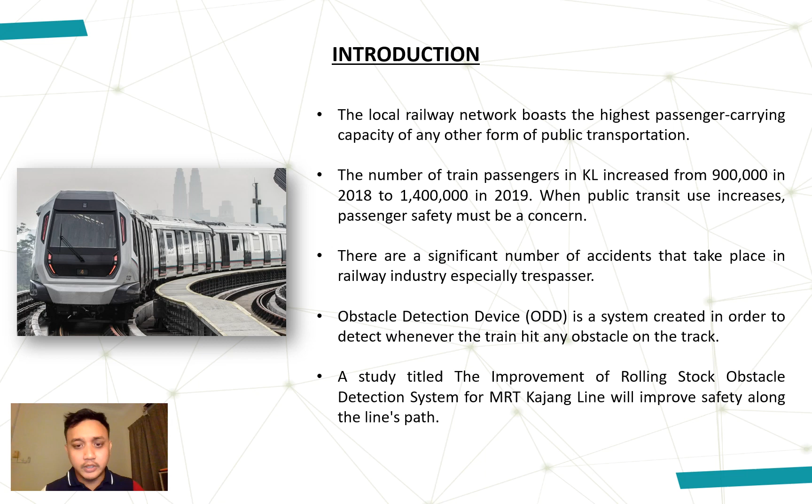The study titled The Improvement of Rolling Stock Obstacle Detection System for MRT Kajang Line will improve safety along the line's path. There are a few problem statements of this study: suicide attempts on the railway track, fatality to passengers, train-to-train collision, damage to company's assets, and the current ODD design does not prevent the train from hitting the obstacle.

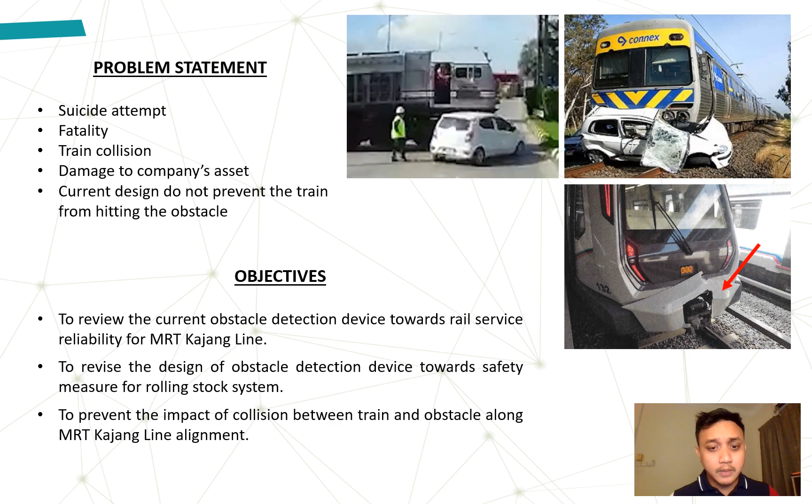Then we proceed to the objectives. The first is to review the current obstacle detection device (ODD) towards rail service reliability for MRT Kajang Line, to revise the design of the obstacle detection device towards safety measures for the rolling stock system, and to prevent the impact of collision between train and obstacle along the MRT Kajang Line alignment.

Please give me a few seconds to watch this video. These incidents happened in MRT Sungai Buloh Depot in 2021. As you can see, there is an obstacle on the railway track. When the train is approaching, it doesn't stop and hits the obstacle.

This is because the current ODD design of MRT Kajang Line follows the concept of hit first, then detect. It does not prevent the train from hitting the obstacle.

The scope and limitations of this study are: focus only on a straight track and will not take into consideration curve and gradient track; practically test the detection method by using an ultrasonic sensor and prototype model; focus only on metro rolling stock, with a maximum speed of 110 km per hour; and the result will be based on the prototype practical test.

The significance of this study will be divided into two, industry and community. For industry: reduce the impact and damage to the train, protect the company from huge loss, reduce the risk of bad company reputation, and ensure the improvement of ridership and revenue.

For community: avoid suicide attempts and fatalities, acquire the trust of passengers by offering safe rail services, encourage the community to utilize public transportation, and avoid trespasser collisions.

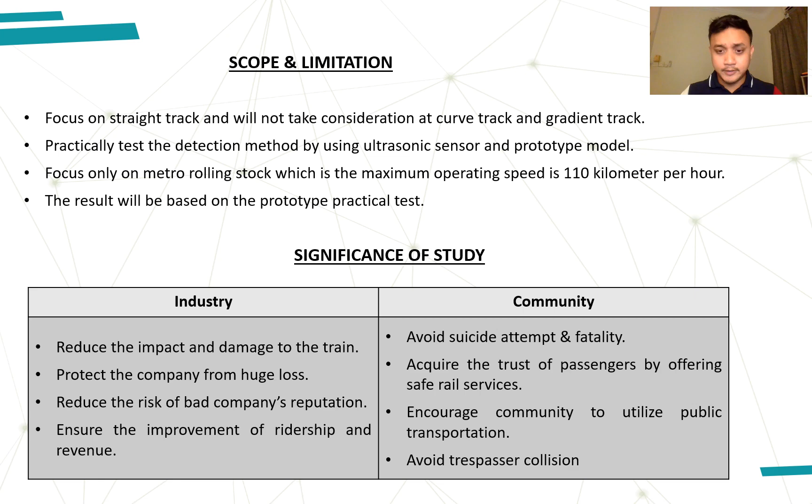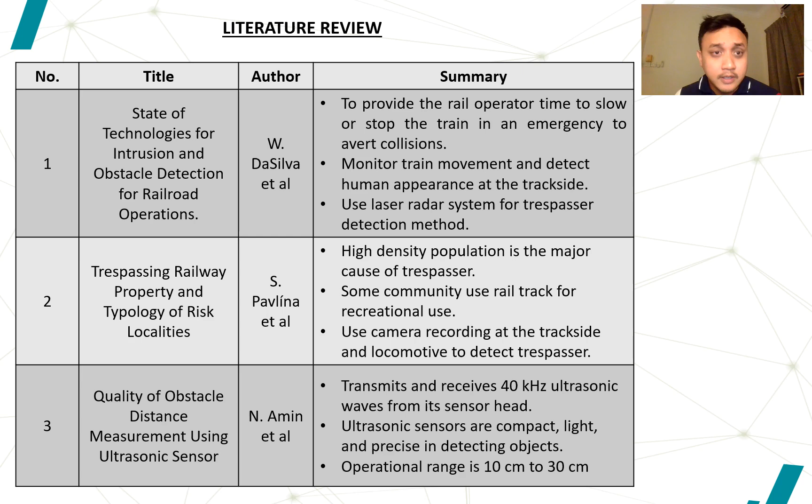For the literature review, there are a few previous studies that have been added as reference for my study. The first is State of Technologies for Intrusion and Obstacle Detection for Railroad Operations, written by Da Silva et al. The second is Trespassing Railway Property and Typology of Risk Localities, by Pavlina et al. The third is The Quality of Obstacle Distance Measurement Using Ultrasonic Sensor, written by Amin et al. This third study is most similar to my study, as the method is the same, using an ultrasonic sensor.

Here are three other previous studies added to my study on the improvement of obstacle detection methods for MRT Kajang Line. First is Obstacle Detection for an Autonomous Robot, written by Raashid et al. Next is the Train Central Control Unit (CCU) of MRT Kajang Line, prepared by Horst et al. The last one is a numerical and experimental study on the obstacle collision avoidance system using a 2D LiDAR sensor. All these studies are regarding obstacle detection methods using various types of sensors to detect obstacles.

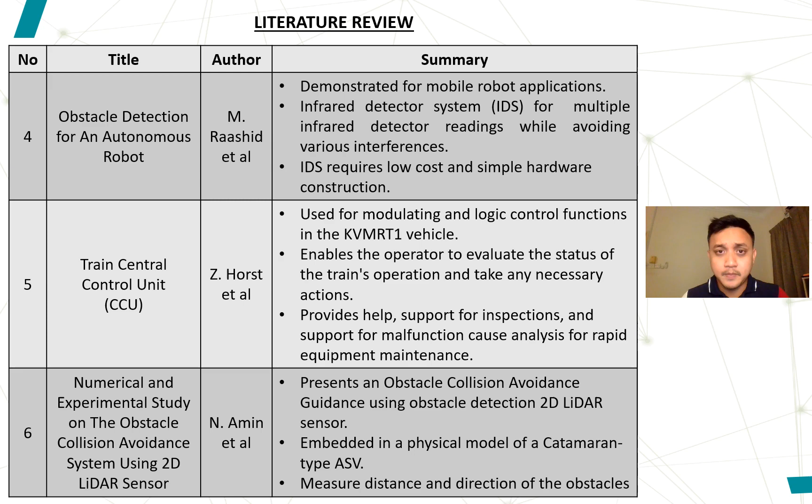For the methodology of this study, we start with the flowchart. First, review design and data collection. Then we proceed to improvise or redesign the obstacle detection system and install a mockup using toy trains. After completing the installation, we proceed to the trial run.

If the trial run is not successful, we go back to redesigning the obstacle detection system and installation. If the trial run is successful, we proceed to evaluation. After evaluation, we compile the results and make a discussion for the study.

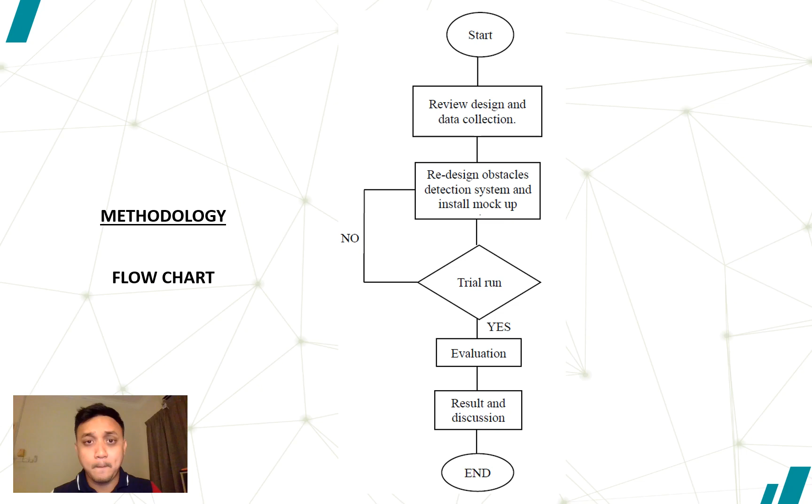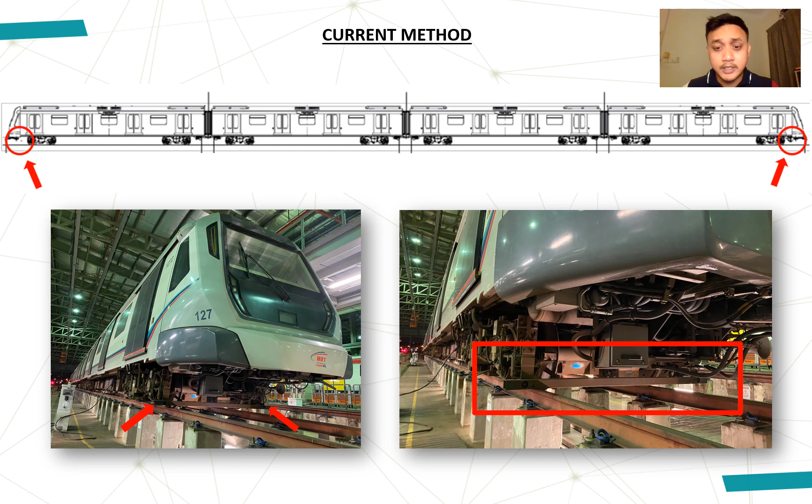That's why previously I stated that the MRT train ODD applies the concept of hit first then detect. I can say it is very inefficient because damage will occur whenever the train hits the obstacle. So the mechanism is: when the train hits the obstacle, the bar will send a signal to the CCU. From the CCU, it will send a signal to the OCC to trigger the maintenance team to clear the obstacle on the railway track.

Now I'm going to explain briefly the proposed method of obstacle detection device for MRT Kajang line. Instead of using an obstacle detection bar, we're going to improve the method by using an ultrasonic sensor. It will be installed at the end car of the train, and it is impossible for me to install it on the actual MRT Kajang line train because it is not allowable for me to revise the design.

But what I'm going to do is install the ultrasonic sensor on a toy train to prove the effectiveness of the proposed method. The ultrasonic sensor can detect the obstacle up to 30 centimeters.

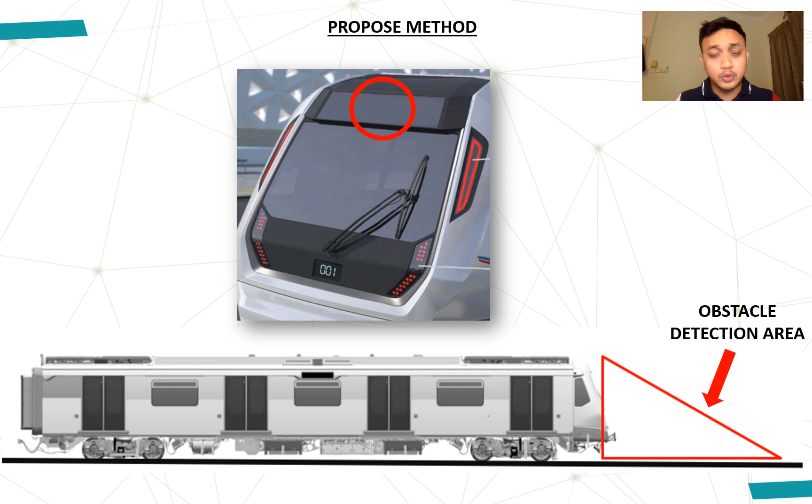There will also be a buzzer. Whenever the ultrasonic sensor detects an obstacle on the railway track, it will immediately stop the train and trigger the buzzer.

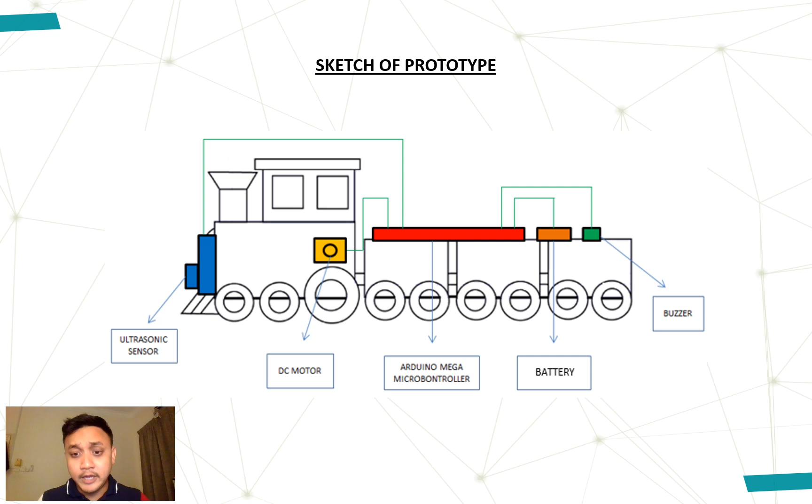Here are the components that I will use to construct the prototype or mockup. First is the Arduino Mega controller. The operating voltage is between 7 volts to 12 volts and the power supply is from a battery. There are 16 input pins for the Arduino controller. It uses DC current and is quite light, only 36 grams, so I can install it on the toy train. The RAM is small, only 8 kilobytes.

The second component is the ultrasonic sensor. As stated, it will be installed at the end of the train. The operating voltage is 5 volts, there are 4 input pins, and the range is 20 centimeters up to 400 centimeters, depending on the type of ultrasonic sensor used. The frequency is 4 MHz.

The toy train operating voltage is 6 volts. The weight is quite light, only 350 grams, and it uses a DC motor.

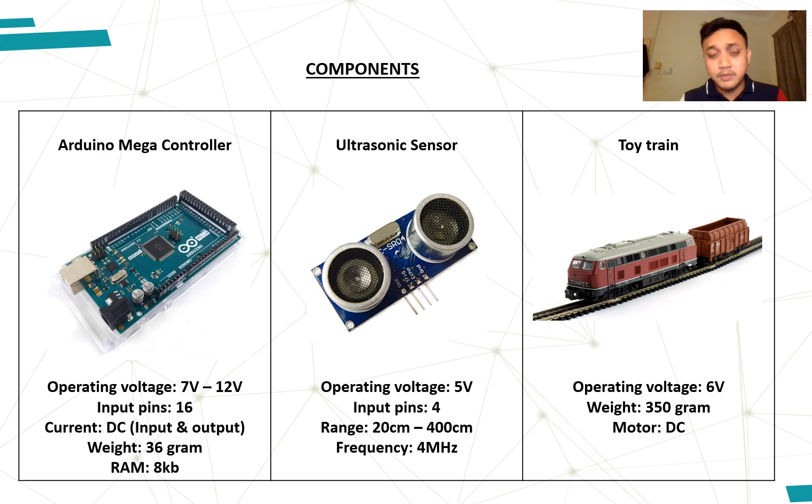Another component for the mockup or prototype is the relay. The trigger voltage is 5 volts, trigger current 70 milliamps. There are 5 pins of configuration. The operating time is 10 milliseconds and it is capable of up to 300 cycles per minute.

Whenever the ultrasonic sensor detects the obstacle, the Arduino Mega will operate the relay and cut off the power to the DC motor. For the buzzer, the operating voltage is 5 volts, it has 2 pins, and the beep style is continuous. For the battery, the supply voltage is 11.1 volts, it is rechargeable, and the material is Li-polymer.

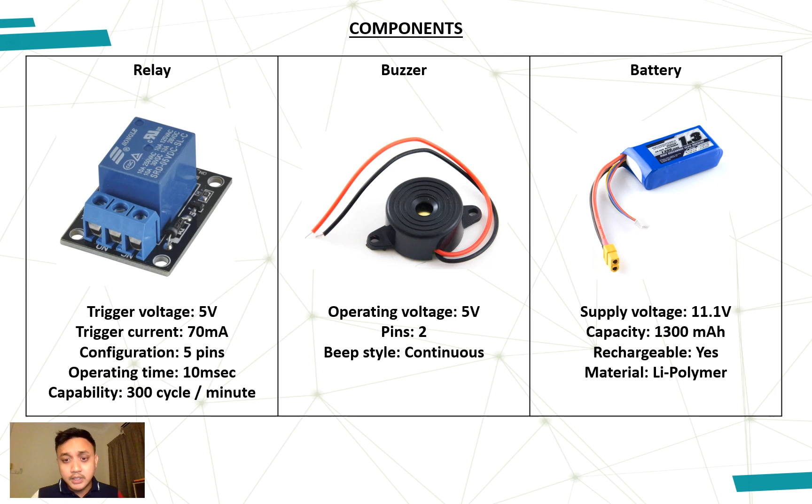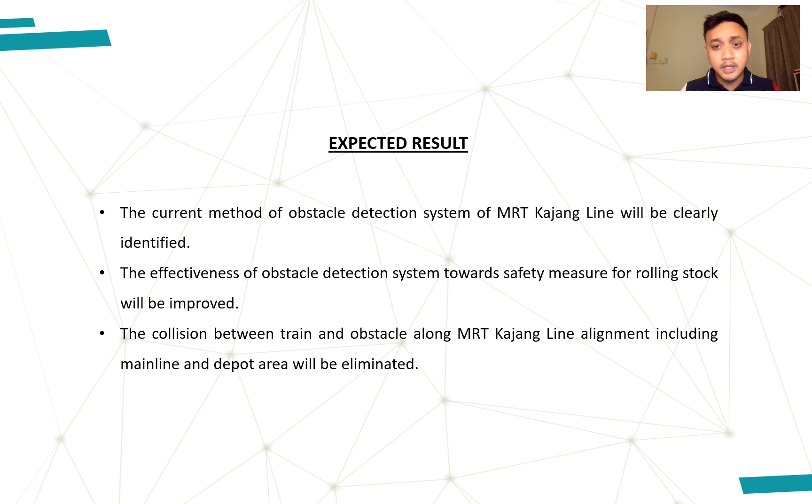The expected results of this study are three. First, the current method of obstacle detection system of MRT Kajang line will be clearly identified. Second, the effectiveness of the obstacle detection system towards safety measures for rolling stock will be improved. Third, collisions between the train and obstacles along the MRT Kajang line alignment, including the main line and depot area, will be eliminated.